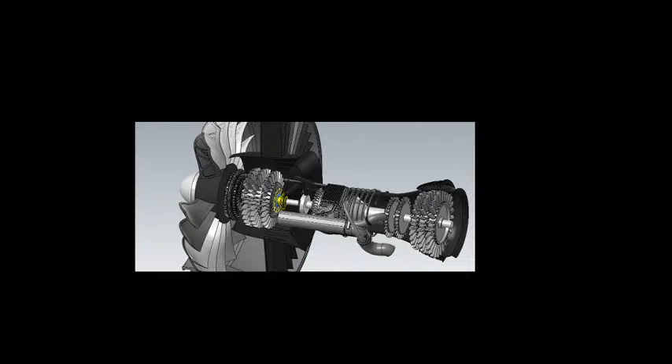So on your screen you could see some complex machines, complex parts of port or manifold. Nowadays the designs are becoming more and more complex, not the way it was earlier when designs were like boxes or shapes which were very simple in shape. With the change of taste of customer, it has been a challenge for companies to manufacture or design the parts the way customers like, and the product life cycle is also very short. So in order to meet this requirement, there is a lot of pressure on the industry to design it in the shortest time, and manufacturing also in the shortest time.

So if the conventional manufacturing keeps on happening, the manufacturing cycle will be too long. That's the reason the introduction of Industry 4.0 has come into place, where CAM has also a greater role, because even if somebody designed the part in a very short time but is not able to manufacture and deliver it, there is no use. The customer will not be able to get the products they are expecting.

The days are gone when the same product, once launched, used to be there for almost 5, 10 years. If you see examples like Ambassador, it had the same model for many years. Premier Padmini had the same model. Even foreign manufacturers those days used to have the same. But now the scenario has changed. Almost every year, every manufacturer is launching 2 to 3 new models.

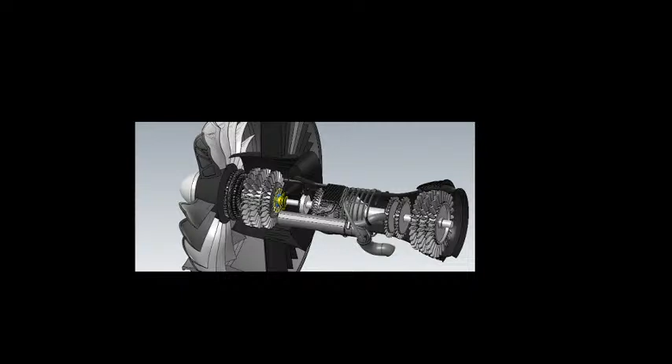So that's the reason digitization and Industry 4.0 are supporting this, because of the computational power of computers and internet connectivity. It's possible to get the parts in sync. Let's say one part is manufactured in Malaysia, the tire from Goodyear Malaysia, or some parts are manufactured in China, Shanghai factory, or an engine part, maybe a critical part of BMW, is manufactured at the Munich facility in Germany. So it depends, and some styling must be done in Italy. So all such things have to be done, and Industry 4.0 helps you get all this in sync.

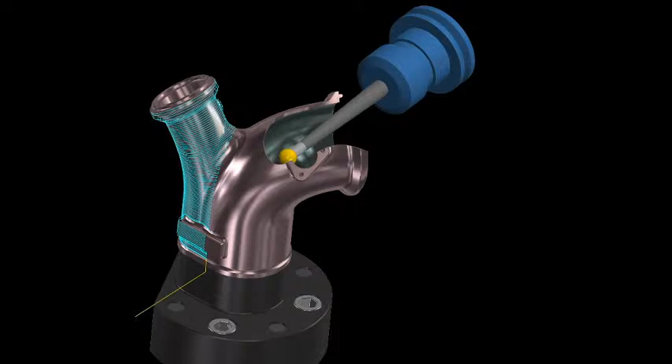So manufacturing has a very important role in Industry 4.0 in today's scenario. We'll see how the software we are discussing today is going to help achieve that kind of result. So first of all, we'll have a look at the history, how the software has evolved, how it is developed, and then we'll look at the software itself directly with hands-on.

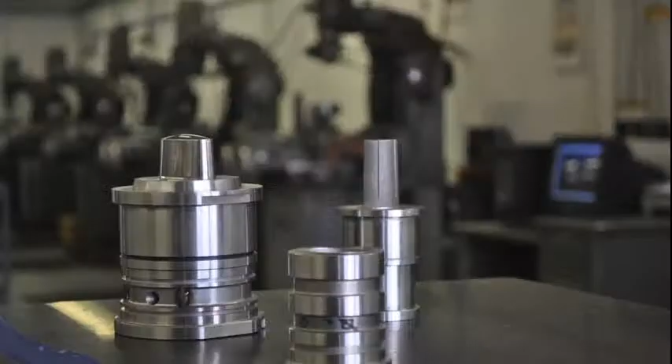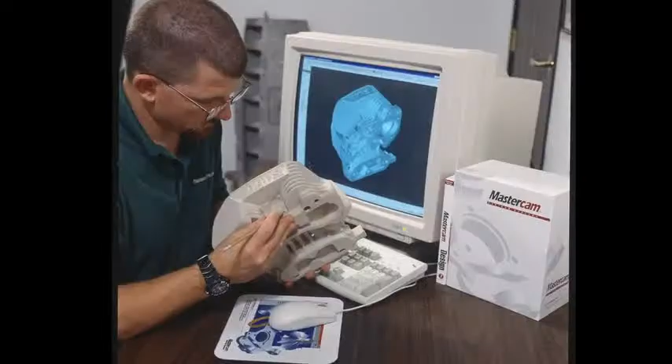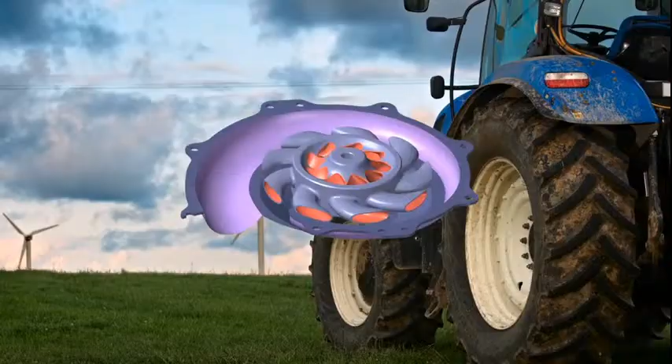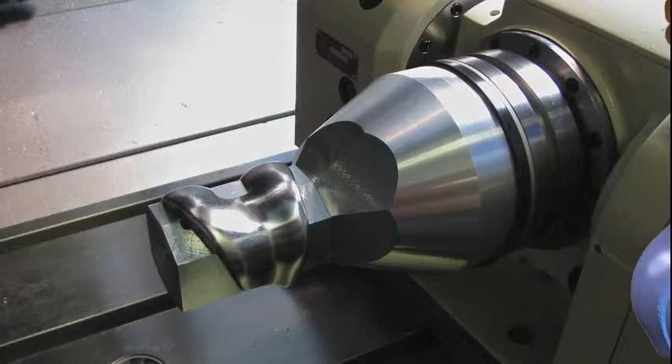Some of the parts we did, we were taking old programs that we were running for years and changing them from 40 minutes to, in some cases, 22 minutes—almost a 50% increase right off the bat. The biggest problem we have right now in roughing out these billet blocks is the chip conveyor won't keep up. Biggest reason to use Mastercam? Flexibility. You wouldn't believe what the energy industry can throw at us. What used to take the clinician 8 to 12 hours, now we're using Mastercam to turn that time around into 1 or 2 hours.

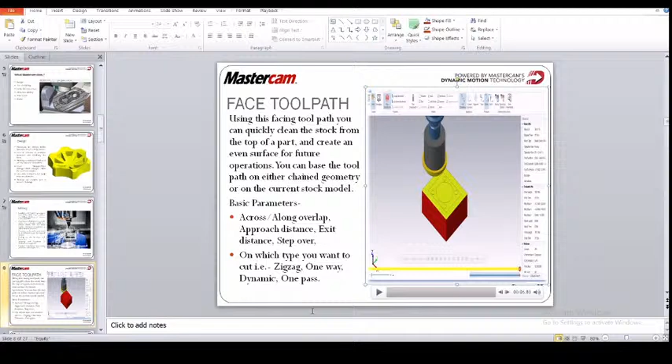As you can see, there is an existing model. On this existing model, I have to create a facing operation. So first of all, for the facing operation, we have to do the stock setup first.

For the stock setup we have to go to the toolpath manager. In this toolpath manager you will get properties, and in these properties you have to set the stock setup. For the stock setup we have to select all entities, and after that give the value of Z for the facing. I have given that and displayed it.

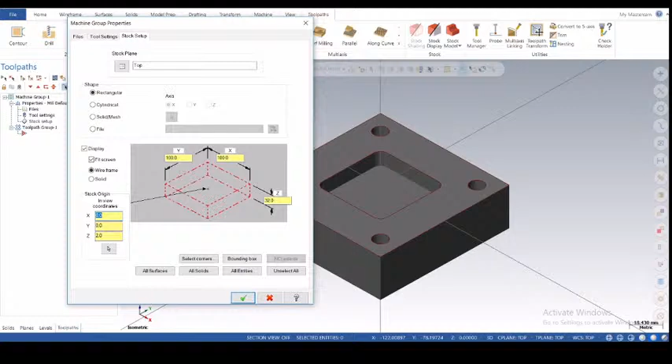After that click on OK, and you will get the wireframe stock. This is our extra Z value, 2 mm.

After that go for the operation from 2D toolpaths. Here you will get so many toolpaths like contour, drill, dynamic mill, facing, dynamic contour, pocket, slot mill. There are various types of toolpaths in 2D.

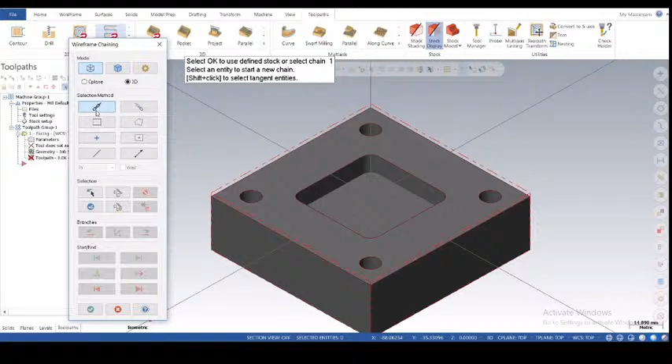So first, face - after clicking on the face toolpath, you will get a window for chain selection. Here we will get many types of methods for selection, and we have to select the chain. After selecting the chain, you have to click on that.

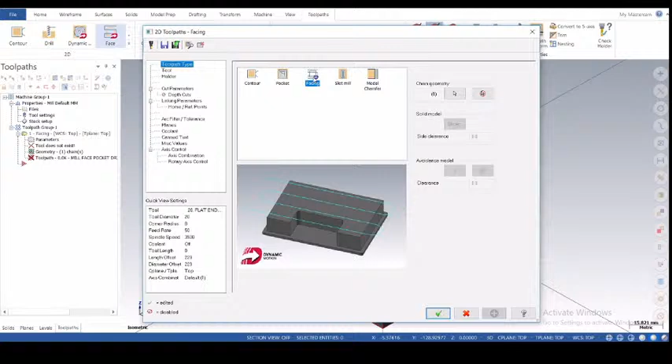After that, OK, and you will get a window for 2D toolpath facing, and according to your application you have to select the toolpath type which you are doing now. So I have to do facing, so I have selected face, and next we have to select the tool.

In this tool you can see there are various types of parameters like tool diameter, corner radius, tool name, tool offset, length offset, head, diameter offset. There are various cutting parameters and tool parameters. According to your application you can give the value of tool parameters or cutting parameters.

In this comment box you can write anything for the operator - for example, I'm writing here that facing with as for my tool that I am using or will use.

So for the tool you have to go to the standard tool library. Click on select library tool, and you will get a lot of tools. If you want to filter, you can also filter. So after filtering I just got a face tool of 50 diameter and clicked on OK.

You can also modify it - right click on the tool and go to edit tool, where you get cutting diameter, secondary diameter, overall length, cutting length, and you can also set which corner type your tool has.

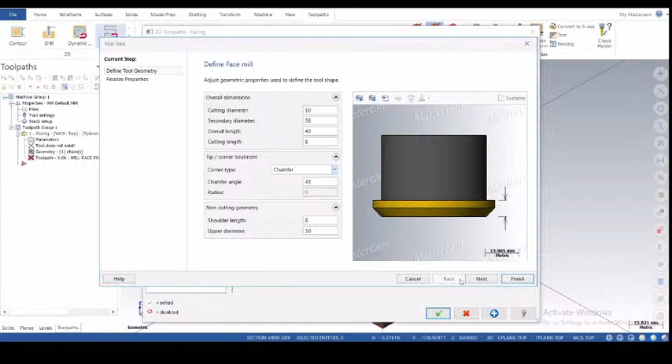After that, finish on that, and in the comment I have just written facing with 50 mm tool. Coming to the next, in holder, as per your facility or availability of holder you can select the holder.

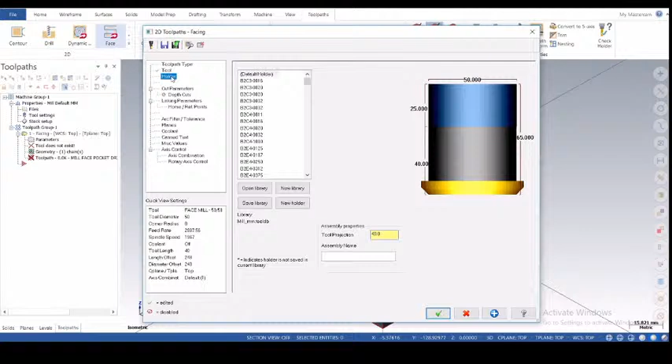I have selected B2C3-0016. Coming to the next parameters, in cutting parameters you will get the style I told you in the PPT - there are 4 types of style like zigzag, one way, one pass, dynamic.

Basically the most preferred style is zigzag, and here we will get across overlap, along overlap, approach distance, exit distance, and step over also.

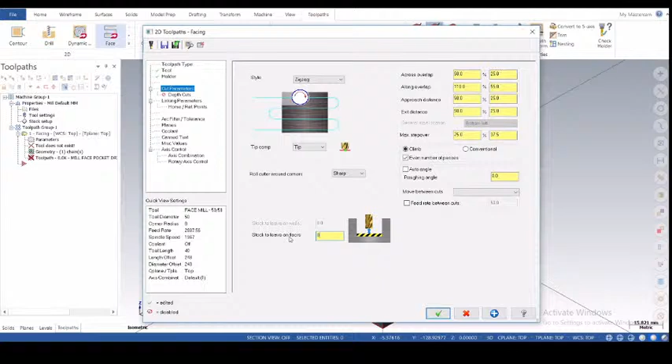After that you can see climb and conventional, like down milling and up milling. After that, if you want stock to leave on floors, then you can give that value, or zero. After that, coming to depth of cuts, you can provide your depth of cut value - I am just providing 0.5.

After that, keep tool down. If you select keep tool down, then your tool does not repeat the time for retraction or clearance. Coming to the next, linking parameters - this is the most important parameter.

So in the linking parameters, you have to select clearance, you can give the value of clearance, and all you have to set in absolute. Feed plane, it's okay with incremental, and depth also in absolute.

As you know, it automatically selects the top of stock. As you know, we have given the Z value plus 2, so it automatically generates that 2, and after that we just have to click OK, and you will see the toolpath here.

Okay, this is our toolpath, and this is our along overlap, this is our across overlap. So let me show you the 2D toolpath of this facing operation.

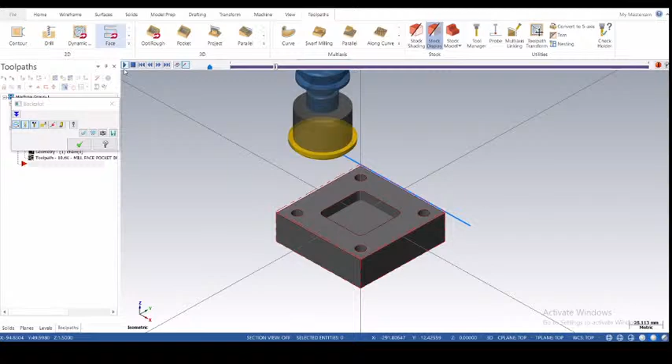Click on this backplot and you will get the 2D toolpath, how it generated, and play. Just see how it cut that material for the facing toolpath. This is our 50% across overlap, this is the along overlap.

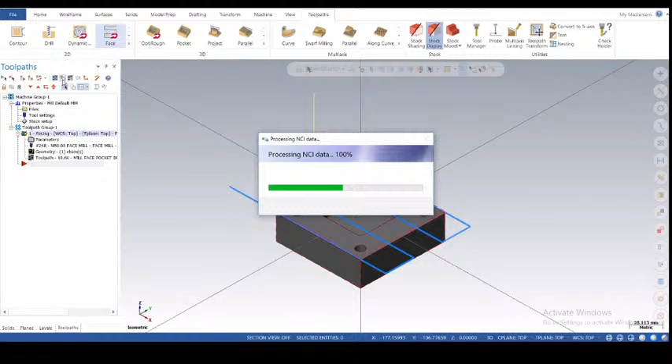And if you want to see it in this 3D simulation window, then you have to go for this verify, and after selecting this verify, you will get another window for the simulation.

As you can see, this is our 3D simulation window. Just decrease the motion of the cutting tool, and in this window you will get so many informations like move ID, move type, and what type of operation you are doing, operation name, and which type of tool you are using. There are various types of information that you will get.

This is our simulation window. Let me start the operation. As you can see, the tool is coming downward and cutting as per our given depth of cut, given style, the cutting method.

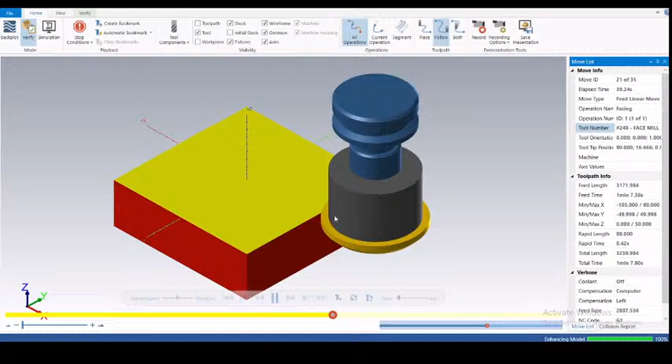So this is it for the facing operation. And if you are talking about how the NC code is generated, then for generating the NC code, you just have to click on this post selected operation, that G1 on G1.

Just click on this, and for post processing you have to click on the NC file and OK, and after the OK he will ask for the root where the file will be saved. I'll just put that on the desktop and save.

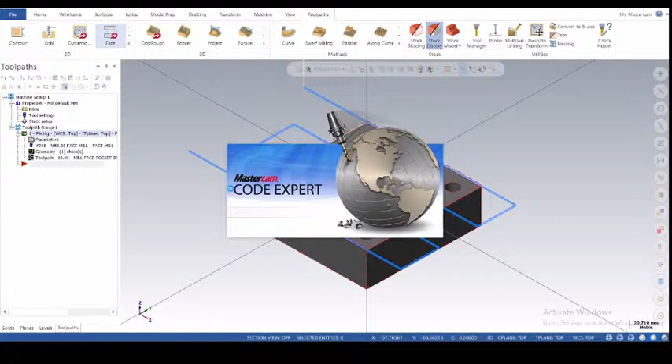After that you will get a Mastercam code expert window, and in this code expert window you will get your NC code, all the NC code as per your command. You will get this, just see.

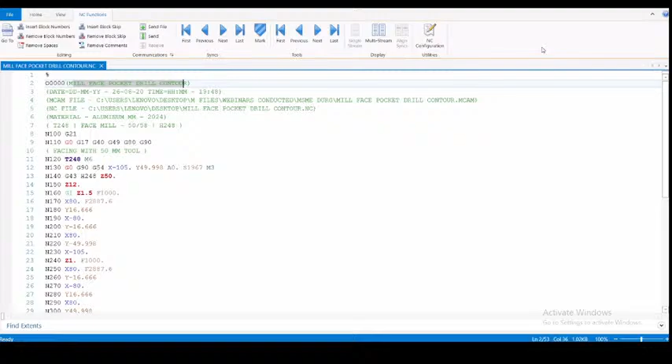Mill face pocket drill contour, this is our all NC code generated. Thank you.

So coming to the next toolpath is our pocket toolpath. Basically this toolpath is used for cleaning out material from an enclosed boundary, using the specified depth of cut. This toolpath is used for roughing purposes, and similar to the other toolpath, there are some basic parameters like rough cutting methods, step over percentage, entry motions, depth of cut, and linking parameters, etc.

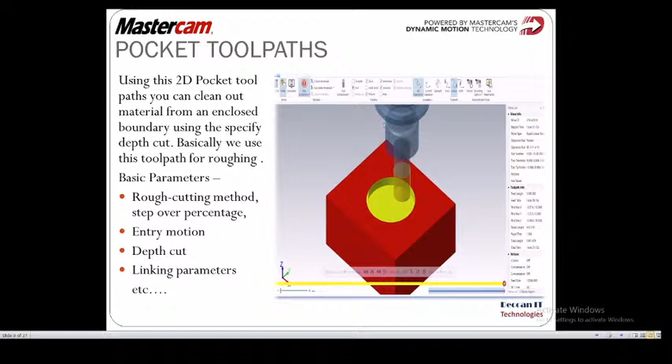So for this, let me show you the Mastercam interface with this pocket toolpath. As you can see, here is an already existing material. On this existing material I have to run pocket.

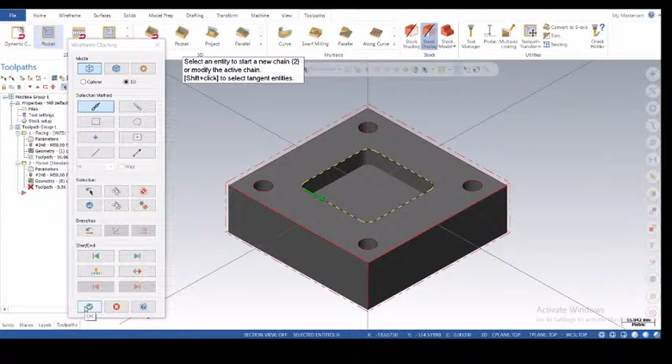So for the pocket, I have to choose this pocket, and by selecting the chain, I have to select that chain, and at this time I have to remember the arrow direction. So this is our toolpath type pocket.

Coming to the next, in select library tool, suppose I have selected a flat end mill. According to your application, you can provide your cutting parameters, tool parameters, and go to the holder, go to the cut parameters.

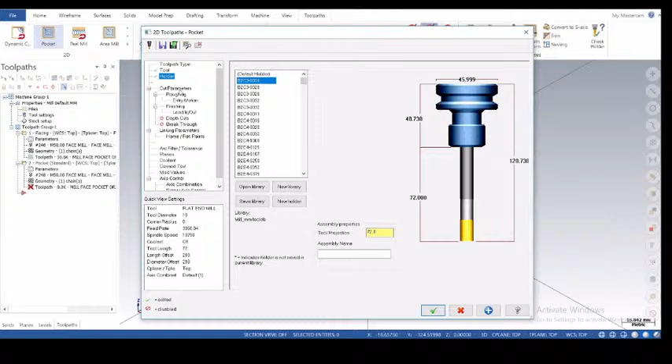Here you can see that stock to leave on walls for the finishing purpose. I just click on 00 because we don't need any finishing purpose. And here is the pocket types, you will get the pocket type standard facing.

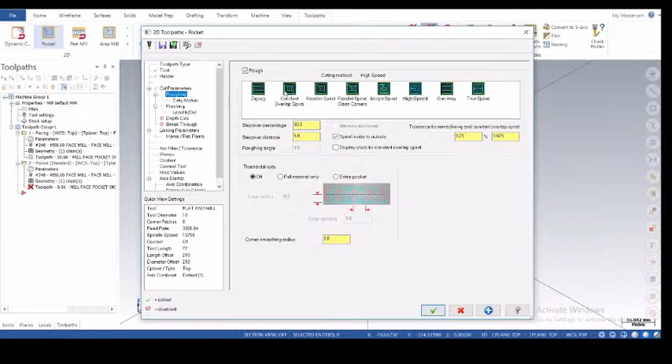Go to the next, roughing. In this roughing you will get some cutting methods like zigzag. I just select parallel. This is the step over percentage or step over distance.

Come to the next, this is the entry motion, how it will enter. And come to the next, in finishing, if you want to do any finishing passes, you can provide that. And lead in, lead out.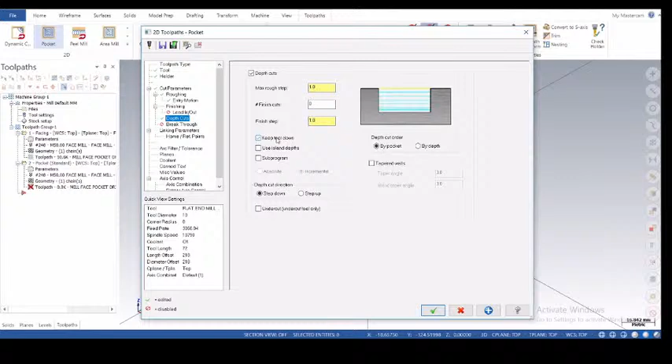This is not necessary. I will tell you about this lead in, lead out, why we actually use that. And depth cuts 1 mm.

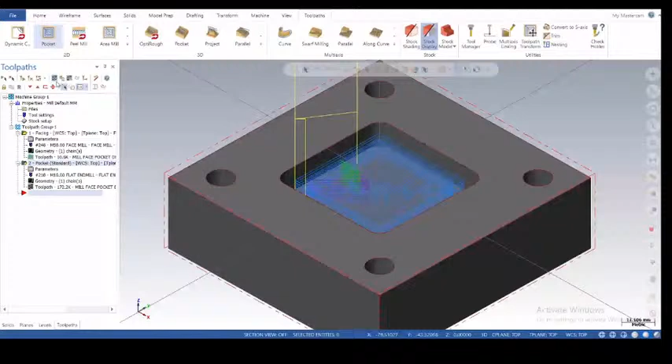As you can see, this is our 2D tool path. Let me show you how it cuts the material.

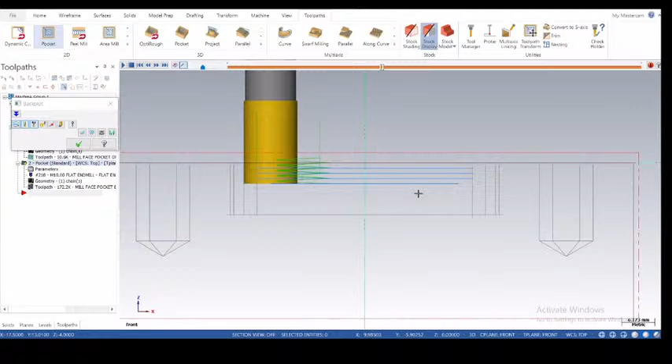So for the 3D, we have to go for this verify, and you have to just start on play, and you can see how the material will be cut.

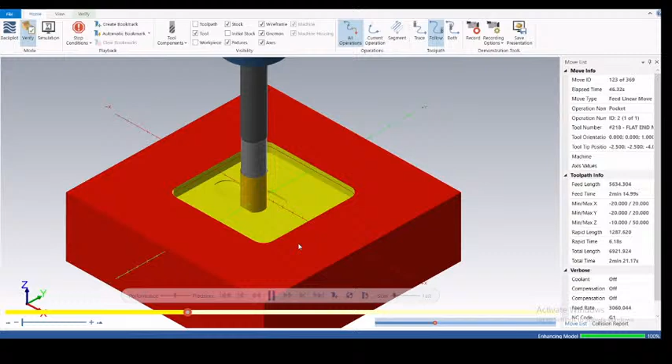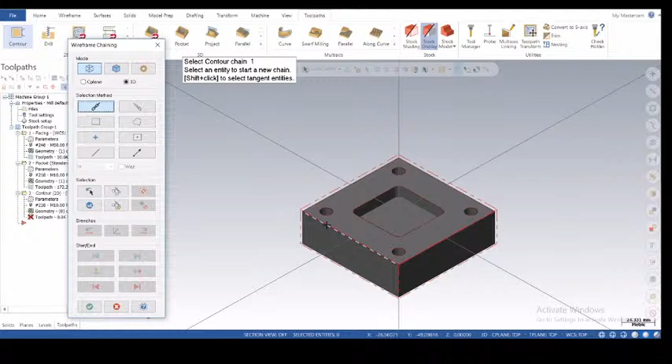So coming to the next operation is our contour operation. For the contouring, we have to select the contour tool path. Here is the contour tool path, and by selecting chain, I have to select the chain for the contour operations. This is our chain.

After that you will get the same window. For the tool path, you have to select the contour, and I've selected the same tool, flat end mill, 10 diameter, and go for the cut parameters.

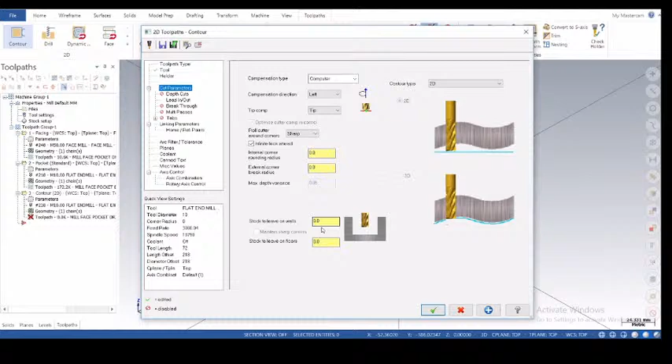Here you have to define compensation direction, on which side that will go. And here is the stock to leave on walls, stock to leave on floors, and go to the depth cuts.

Keep tool down. Lead in, lead out - here this lead in, lead out is needed. And if you need any multi-passes, then you can also provide that.

Come to the next, the linking parameters. Just provide the value and depth.

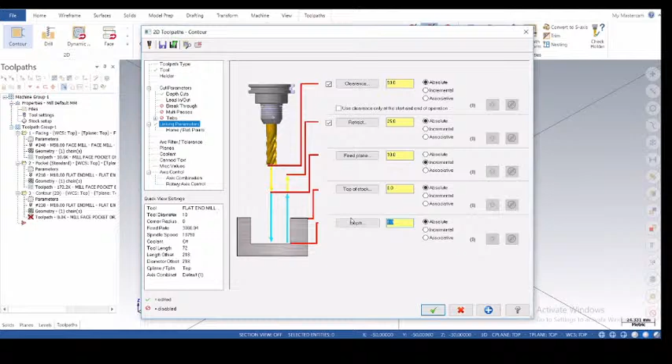Just see, because we did the cut parameters right, so you will get the contour tool path.

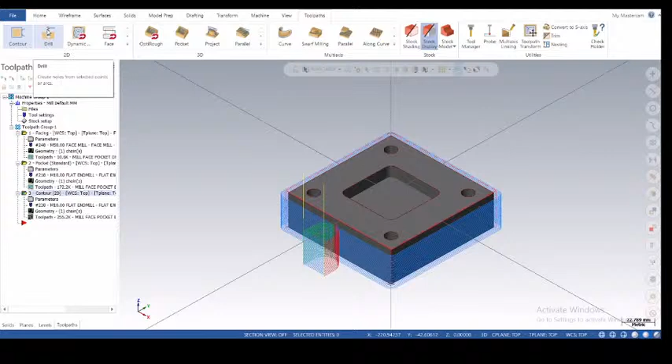After that we will go for the next operation, our drill. For the drill we have to select the drill, 2D drill tool path. By selecting this mask on arc, we have to select or find out the arc. After that, just drag on that and drop, and by selecting the order you can define the order.

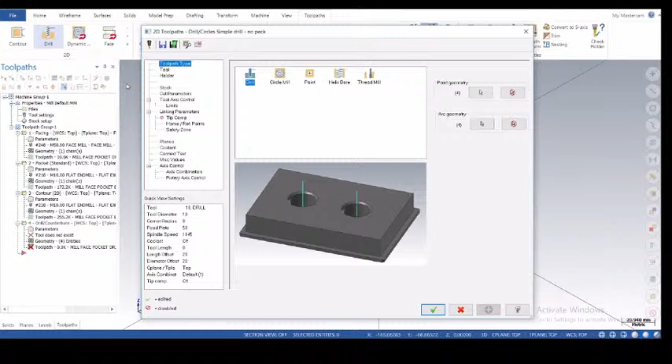Same as it is, go for the tool as per your diameter. If there are any availability, then it will be easily identified.

You will get - there are a lot of types of tool, and this is our drill. 10 diameter, that is availability of the 10 diameter drill tool.

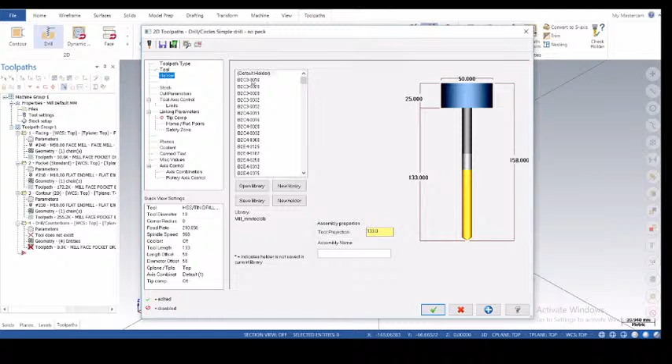And go for the holder, select the holder, stock, non-edit, cut parameters, what type of cycle you want. If you want a peck drill, then just click on the peck drill and give the peck value.

Go for the linking parameters. Activate the clearance and retract, and go for the top of stock and depth.

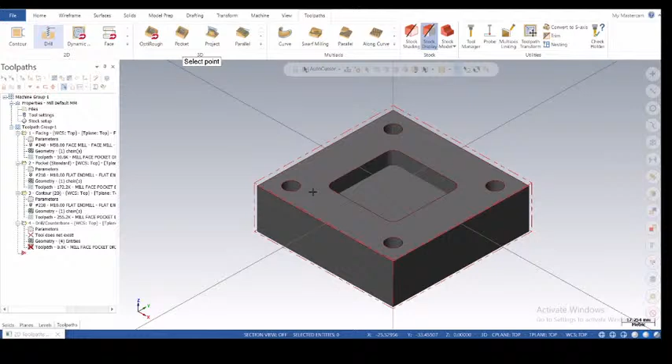How much depth do you want? As you can see, this is our depth, so I just gave that, and okay, this is my toolpath generated.

Now I will show you the whole operations in a 3D simulation window. Just click on it and regenerate all toolpath and go for the verify.

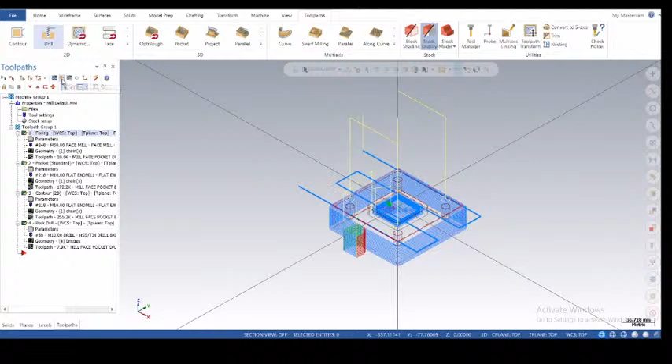Here you can apply a stop condition by choosing the operation change, and you can give the control loop by operations, and just start it.

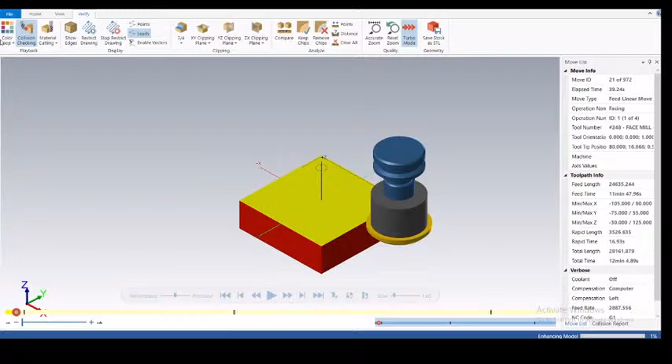Just a minute... Okay, now start. So first, facing operation is done.

Next is our pocket operation. And next operation is contour - here you can see that in the information.

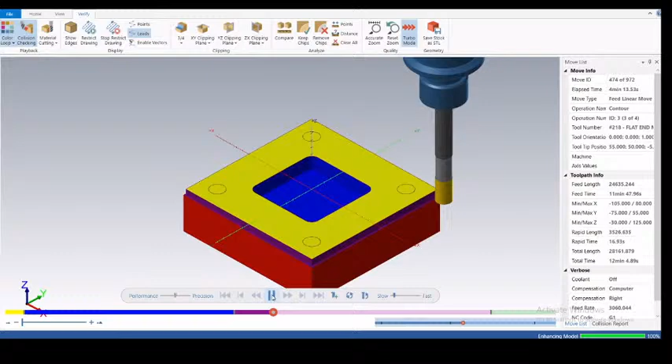And next operation is our drill. So this is it, the whole operations.

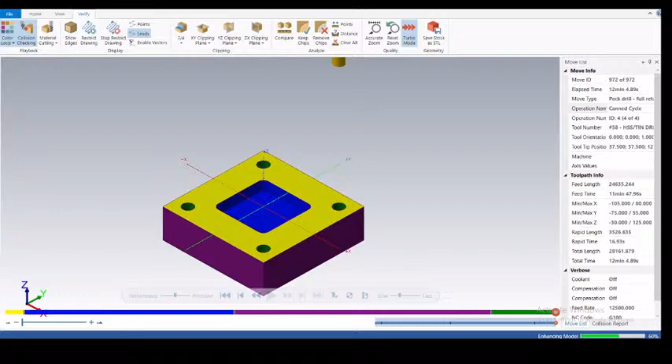So how will the NC codes be generated? For that you have to go to this post selected operation, that is the G1 symbol, and click on that, and click on the NC file and just click OK.

After OK, you will get a window for saving file, the root file. After that just click save, replace it rather than previous operations, and you will get a Mastercam Code Expert window, and here you will be able to find your NC codes.

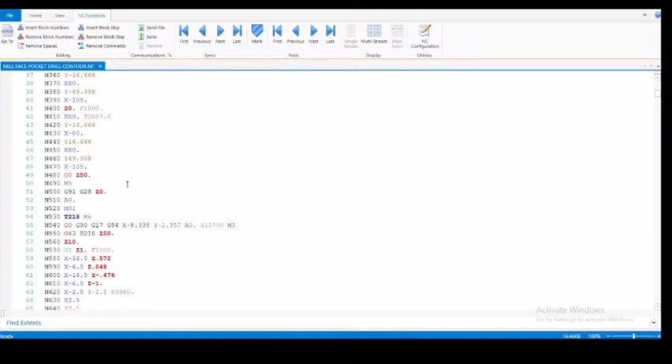Here's the NC code generated. All the operations that you have done, you will get all the NC code very easily within a short time.